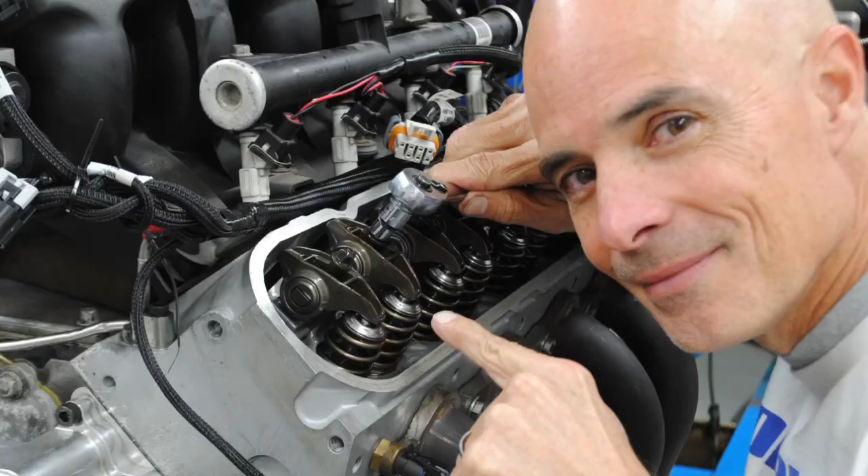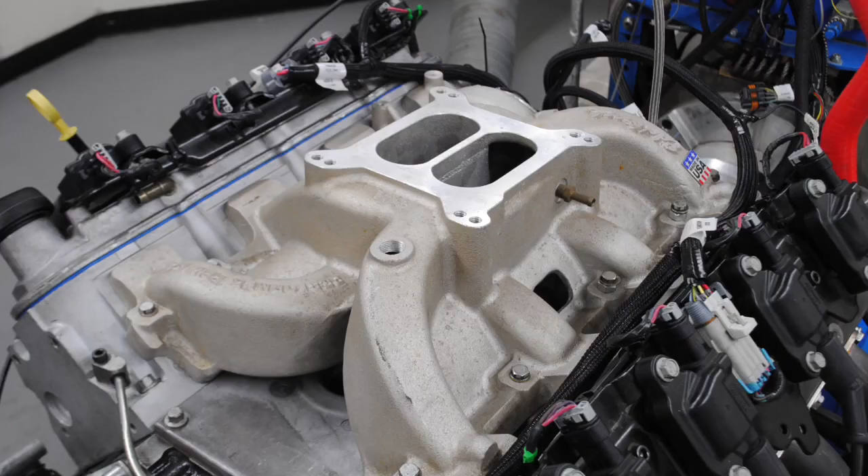I have a couple of questions for you. Who loves the 4.8 liter? Yes, I'm one of those guys. How do we make more power with a 4.8, without resorting to over-camming? Very important on a 4.8 liter. What about carbureted 4.8s, guys? I'm going to show you which intake to pick, because just like it's easy to over-cam a 4.8, it's easy to over-intake a carbureted 4.8. What does Richard mean by all this? Let's check it out.

Okay, guys, let's jump right in and take a look at how we upgrade our 4.8 - the little engine that could, the smallest version of the LS family. For that, it's sometimes looked down upon by its big brothers, the 5.3, the 6.0, 6.2, and the 7 liter, I guess. But the 4.8 liter can be made to make really good power.

So the question is, how do we get more power from it? I'm going to show you exactly that. I'm going to show you how we got more power from a fuel-injected version and how we got more power from a carbureted version, because believe it or not, lots of guys run carburetors, especially since it's so simple.

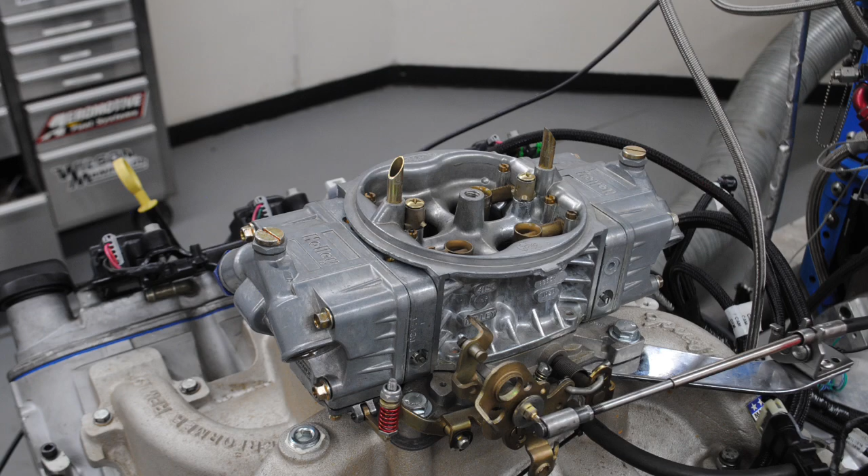All you have to do is install an ignition controller. There are lots of different carbureted intake manifolds, obviously lots of carburetors to make this work. You can go ahead with your ignition controller, dial in the timing curve that you want, and it really works fairly well. So for a guy putting that in, I'm going to show you on the carbureted version which intake manifold would be a much better choice on the little 4.8 liter.

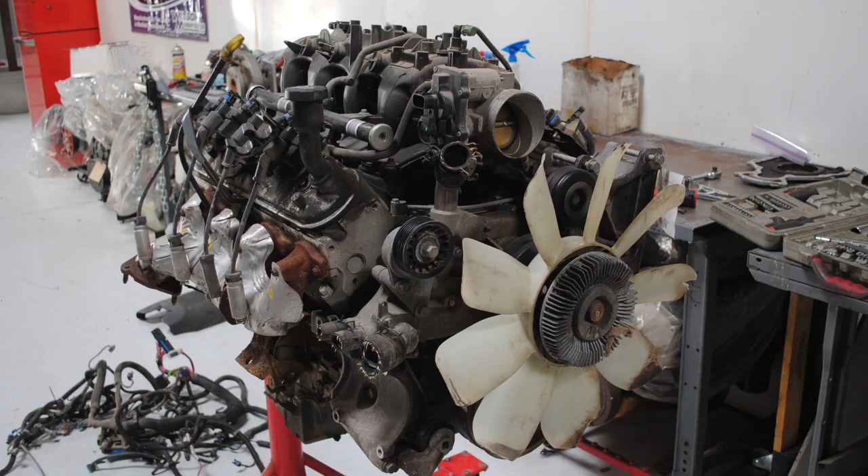But for now, let's take a look at what happened when we ran our 4.8 liter in fuel injected form. So we got our motor from the wrecking yard, and actually this isn't totally a junkyard motor - it started out as that. Long ago, we had hurt one of the pistons, and so we replaced them all, obviously.

Other than a set of JE forged pistons in this thing, everything else was stock. It had a stock block, stock crank, stock rods - these were Gen 4 stuff. We had the JE forged pistons with small domes on them. We had our 706 heads that already had a spring upgrade. We have the stock truck intake manifold and throttle body. We did put bigger injectors in it so that we could supply the fuel needed for the higher power level.

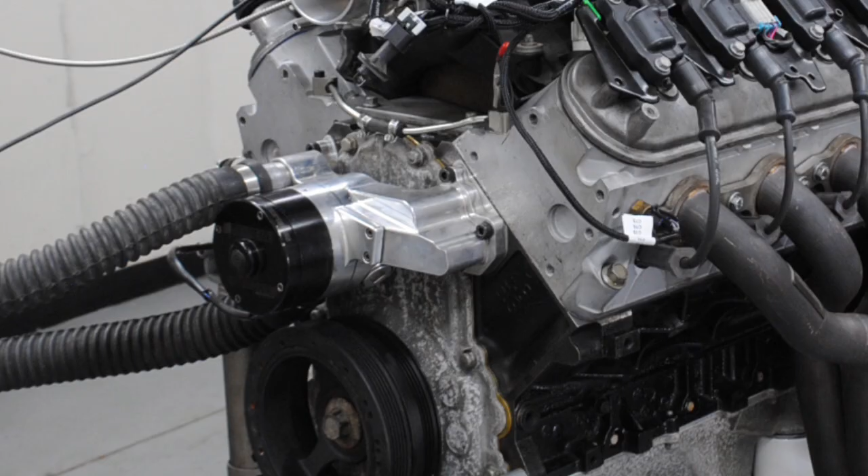We ran all of this with a Holley HP management system. We had a Meziere electric water pump, and then the long tube headers were 1 7/8 Holley swap headers with collector extensions on them. So this thing was working fairly well.

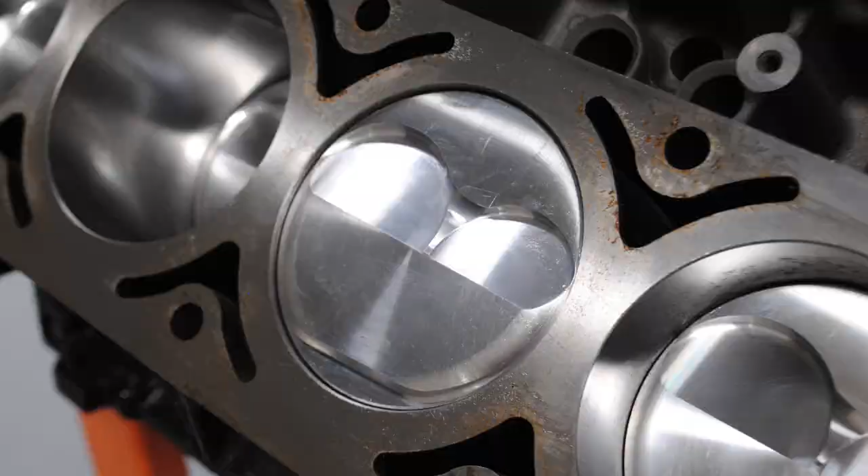The interesting part about this - I overlaid a couple of other just junkyard motors that we got from the wrecking yard in 4.8s, and they made very, very similar power. In fact, it's almost a direct overlay on a lot of these. I was surprised the dome piston wouldn't have added a little bit more power, but maybe this motor started out a little bit lower than the others, and then the dome piston brought us back. But at any rate, this is what you would get if you actually just got one from the wrecking yard, and it would work equally well for these kind of modifications.

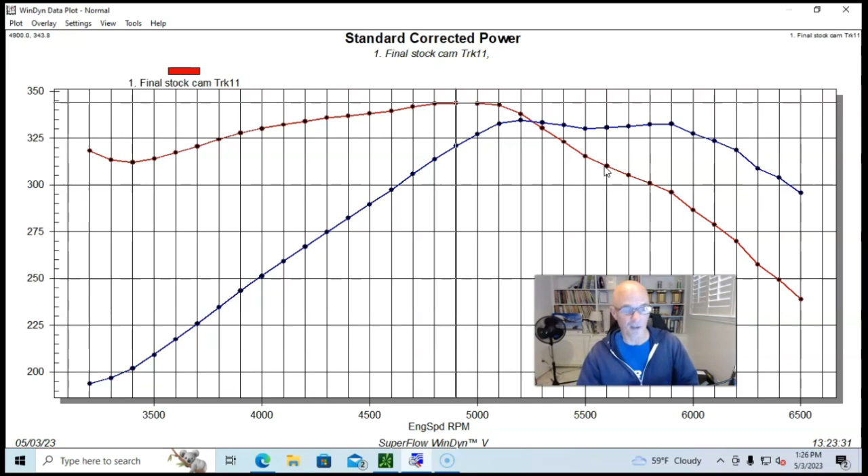We're only looking at a difference of about 3 horsepower there. So it stays fairly flat for a long ways and then falls off out towards 6,500, owing to the mild camshaft basically. We'll see what happens when we change that, because we did pick up quite a bit of power.

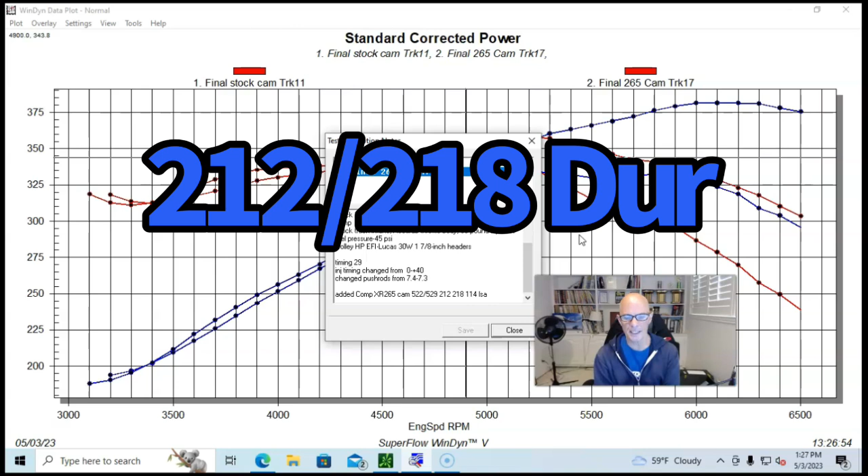So here's what happened when we added a small camshaft. This one was a Comp Extreme Energy XR265 camshaft. I'll go ahead and talk about it - it's your typical kind of truck cam. It was a .522/.529 lift split, a 212/218 degree duration split, and a 114 degree lobe separation angle. Fairly mild as things go.

But this is an important part for when we're taking a look at a 4.8 liter - you don't want to over-cam it. You can see this is a 212 cam, and most of the gains came past 5,000 RPM.

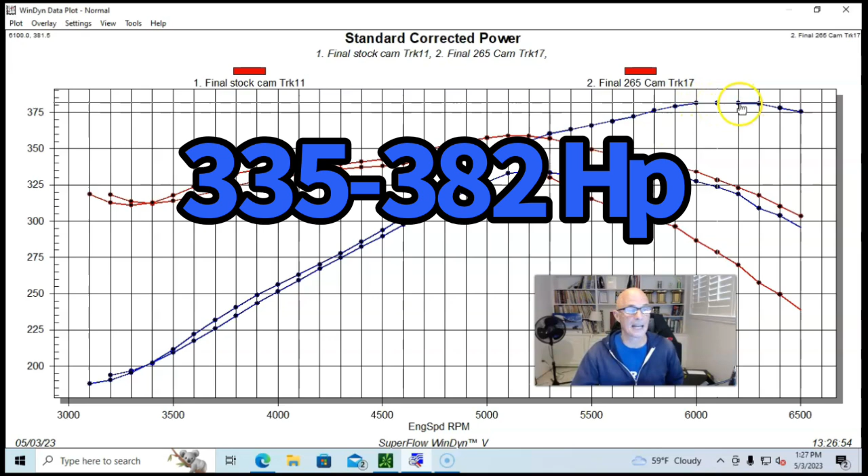So we went from 335 horsepower up to 382 horsepower. So it did good - we got good gains, and peak torque was up also, although not by much, to 359 foot-pounds, mostly because most of the gains came past the crossover point of horsepower and torque at 5252. So you can see we got good gains here, but we're not making quite as much power as we wanted.

Sure, we could put a bigger camshaft in it. You could put a different intake manifold on it. You could put cylinder heads on it. But what that's really going to do is add a bunch of power at the very top of the rev range. And if you put any more camshaft in it, this thing is going to be like a 7,000 RPM motor - a lot of guys don't want that.

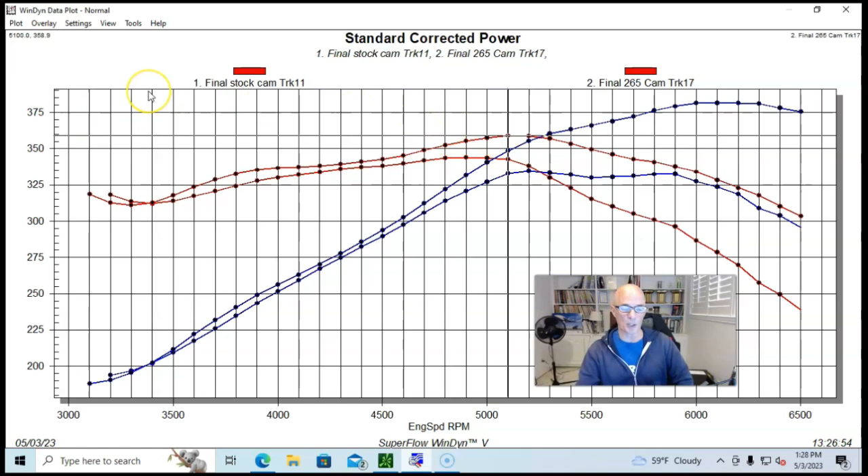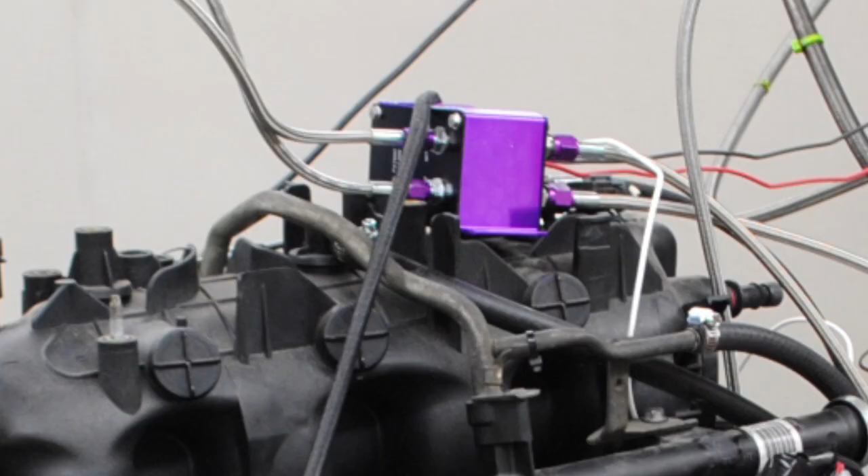But the easy way to add lots of power, and you can add it all the way through the curve if you want, is to add a simple wet nitrous setup. And we added a Zex kit. It was a wet EFI setup, meaning it has a single fogger nozzle, which we located and positioned in front of the throttle body. The single fogger nozzle is fed nitrous and fuel from a controller. We control the amount applied with jetting, and this stuff gets injected right into the factory intake manifold.

And you can see we made lots of power - we were up just over 500 horsepower. On the hit, 507, and it maintained right at 499.4 horsepower, and carried that, kind of mimicking the curve with the XR265 camshaft with the nitrous.

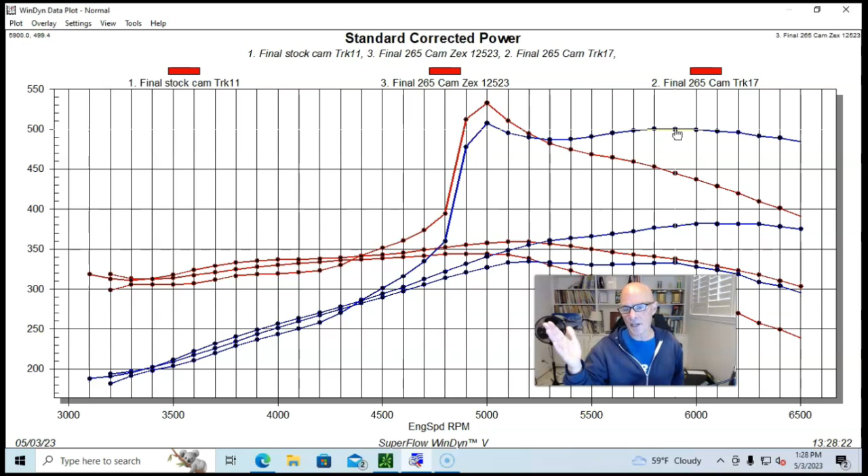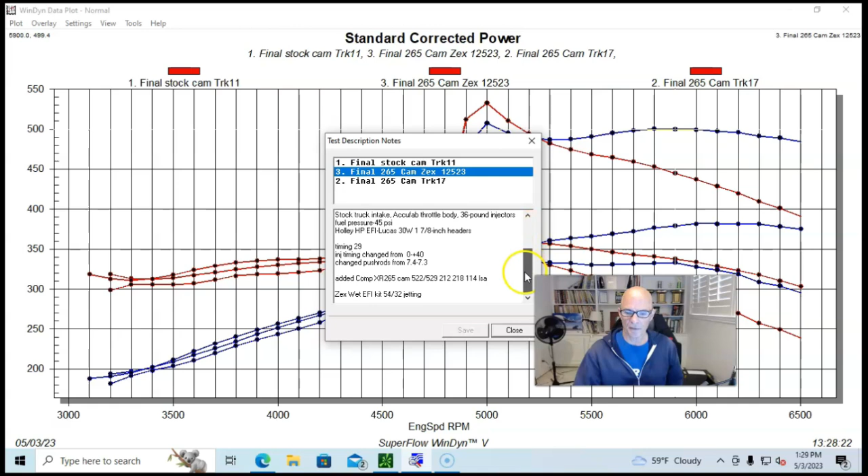So obviously we had done our homework, and we know how to set the nitrous up. We pulled 4 degrees of timing on this. The jetting was a 54 nitrous jet and a 32 fuel jet, for those guys keeping score. And if you want to duplicate this, that's the jetting we used in the nitrous setup in the Zex kit, and it worked out very well.

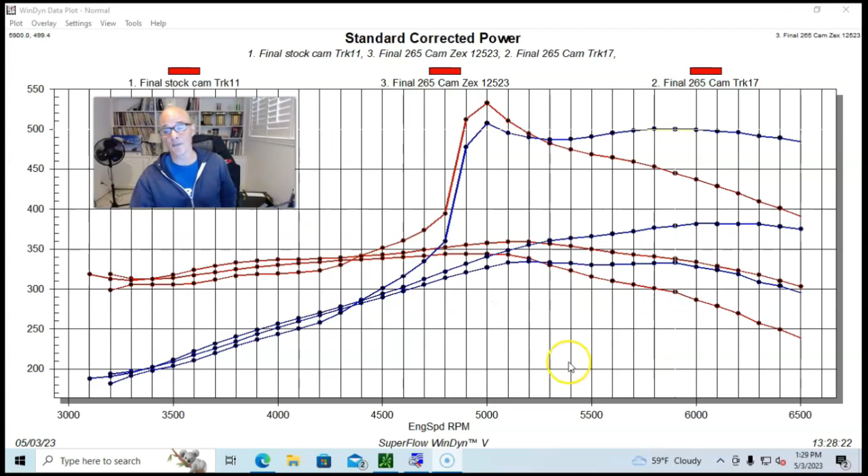So as you can see, 500 horsepower from a 4.8 liter, just a cam and springs and nitrous - it worked out really well.

So now let's take a look and see what happened when we ran this version with a carburetor. Now that we've taken a look at what our fuel-injected 4.8 liter is capable of with a simple cam swap and then the installation of nitrous on our EFI motor, let's see what we can do for that carbureted contingent. We got our 4.8 liter, and what we have is we've replaced the factory truck intake manifold for EFI with a simple carbureted induction system that included, in this case, a dual plane Edelbrock Performer RPM intake manifold, and we ran a 650 Holley carburetor - and you can see the combination worked out fairly well.

We're going to compare that to the truck EFI guys, because we know the EFI guys want to be better than the carbureted guys, but mostly what we're going to do is compare a single plane and dual plane carbureted combinations, because this is very important, even more so on the 4.8 liter.

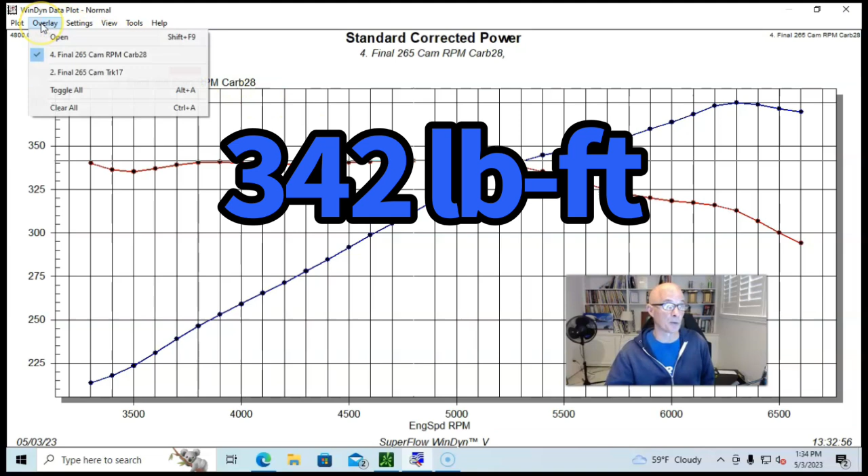And the interesting thing is if we compare this to the factory truck intake manifold, EFI guys get ready to make some comments. The truck manifold was better from 4,500 out to about 6,500. The power outputs were very comparable out at 6,500, but the truck manifold offered a good bit more torque in the meaty part of the curve.

The interesting thing I wanted to show you is take a look down low though. Below 4,000 RPM, and actually down below 4,300 RPM, where typically we would associate torque production with the long runner EFI intake manifold. In fact, the dual plane carbureted manifold made more power down there than the truck manifold did. You can see it's by a pretty good bit below 3,500 RPM.

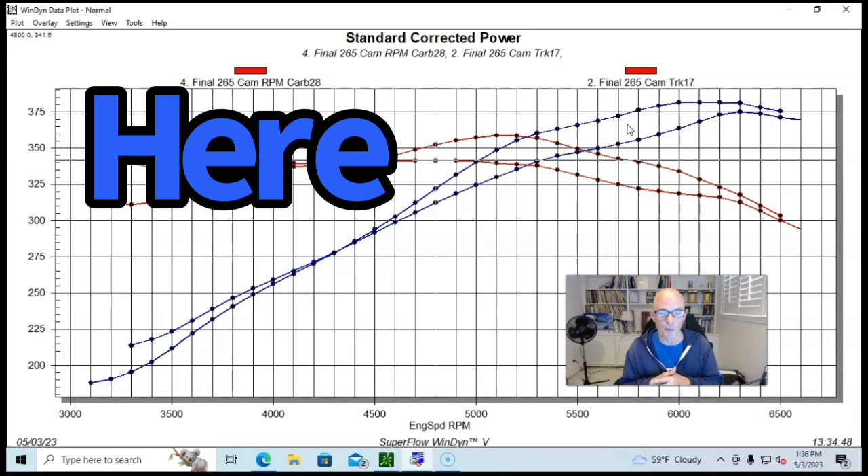And that's interesting. So the dual plane carbureted stuff, there's an argument that it's going to be very responsive and fun to drive down there where you spend a lot of your time, and it's equal or better than the EFI stuff below 4,500 RPM. So if you're driving around and using most of that RPM range, the dual plane carbureted stuff is probably a pretty good combination.

If you were to race these, the EFI motor would definitely make more power, for a good part of the curve, and part of the curve that you'd be using during track acceleration. So the EFI combination probably would be better, but the carbureted motor works very well.

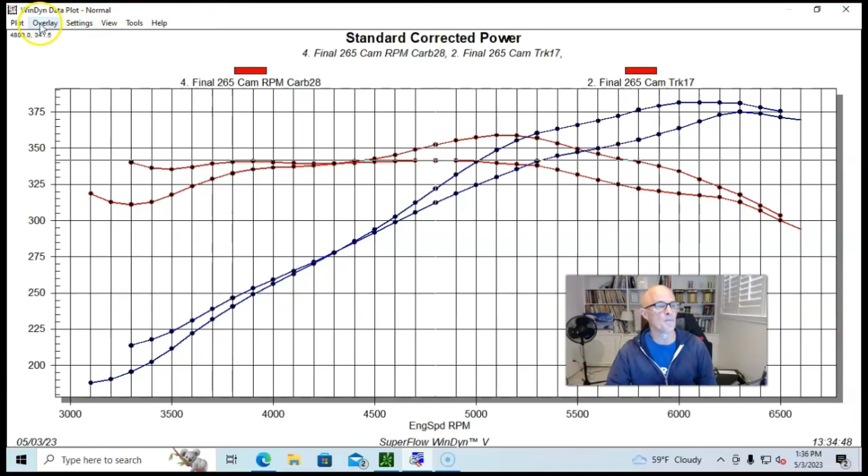I'm going to go ahead and get rid of our EFI combination. This is our dual plane combination. And here's a very important point, especially on the 4.8 liter. If you're running the small 4.8 liter, and especially if you've added a camshaft to that, you want to be very careful about your intake manifolds.

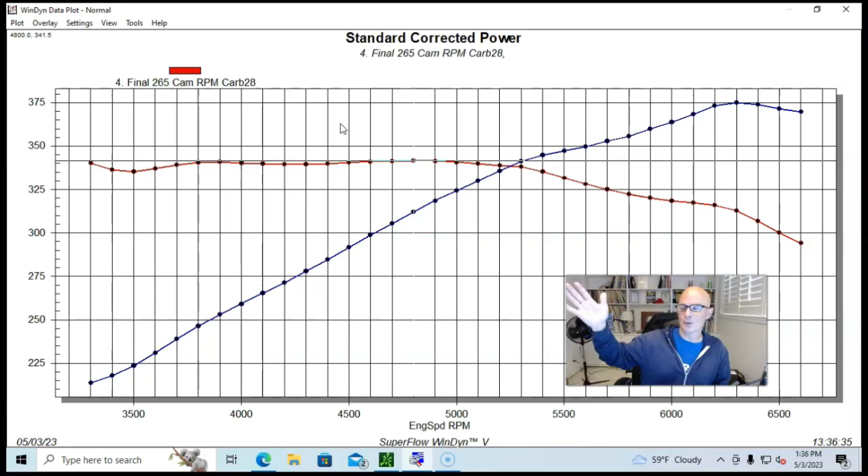Lots of guys sell single plane intake manifolds, and you might think, well, the 4.8 liter loves to rev. Yes, it has to rev, I guess. But even though it does want to make power at a fairly high RPM, out at 6,200 or 6,300, you might think a single plane should shine out there, but it doesn't.

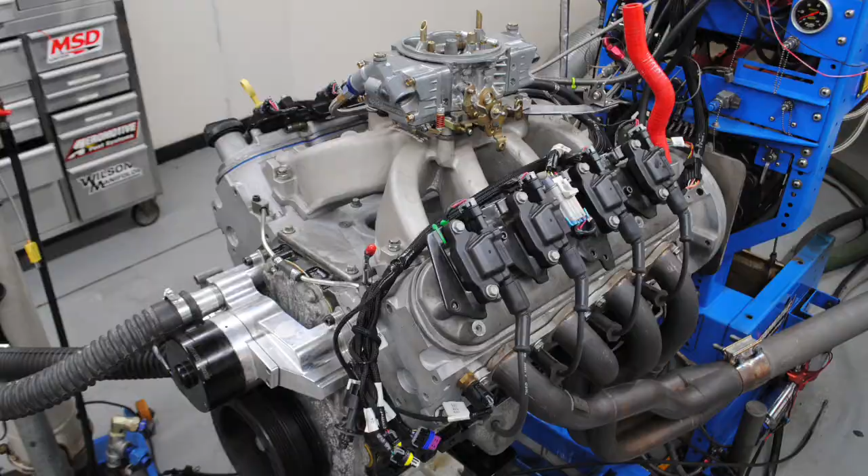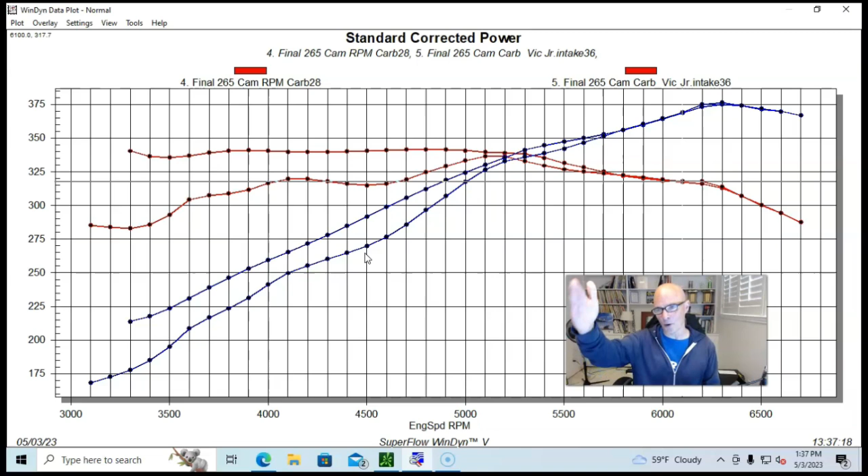Here's what a single plane does, because we compared it directly to this one. We ran the Edelbrock Victor Jr. intake manifold. As you can see, from about 5,800 on out, it was kind of the same as the dual plane. They both were making peak power at about the same RPM.

But the thing is, everywhere below that, the single plane made a lot less power on the 4.8 liter, and it would not be fun to drive. It would not be responsive. It would not have good signal strength to the carburetor. The single plane on a 4.8 is just not really a good choice, especially when teamed with a fairly mild camshaft like this 265 cam.

So here's the thing. If you're going to get a 4.8 and you're putting a mild cam in it, and you want something you could drive around and make power up to 6,500 RPM, definitely on the 4.8, go with a dual plane.